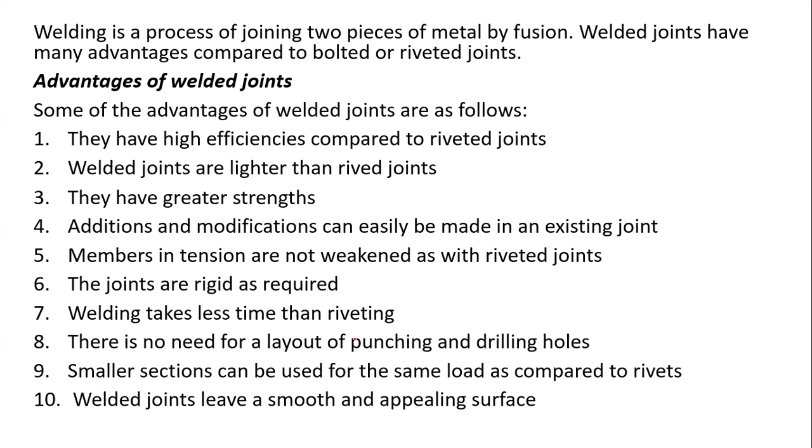And of course, smaller sections can be used as compared to the riveted ones. Then even the outlook, if you look at a welded joint, it looks smooth and appealing. The surface finish is quite proficient and more appealing compared to a riveted joint.

The bad side, welding is not a skill that you can just go to the road and pick anyone to do it. Riveting, as long as you've done a good job with drilling and punching in the right places, anyone can come and rivet your joints. It's not one that always requires skilled manpower. And when you look at welding itself, along the way, it distorts the members because you're talking about melting the materials that are involved, fusing them together.

Then also, inspecting those joints can be difficult as compared to riveted joints. Then also during welding, you have cracks that will be formed. Sometimes you also have stresses forming as a result of that. And remember also, the equipment you're going to use is expensive. And it's not one that you can just easily connect. It has parameters that you need to use as you do the connection. So equipment is more expensive as compared to riveting, which is relatively affordable and easier to organize.

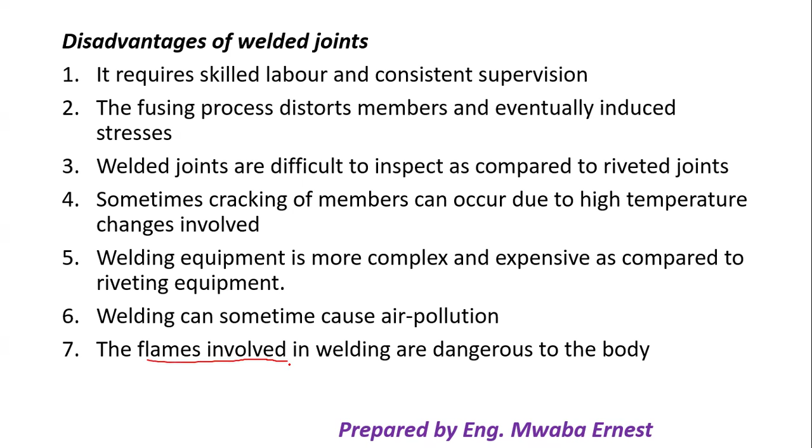When you are welding, you need good PPE that will protect your respiratory system, because the fumes that come from there pollute the environment. Even the light coming from the place where you're doing the welding can also be dangerous to your sight or to your eyes. Here we're talking about the same flames. So it is a health hazard. Welding can be so dangerous as compared to riveting in those areas.

Types of welds, we have butt welds. A butt weld, like we had mentioned, is where we bring the two ends of the materials together. Then perhaps we may do some mini grinding, and then we start welding the materials so that they can be properly fused together, making different shapes as you do that.

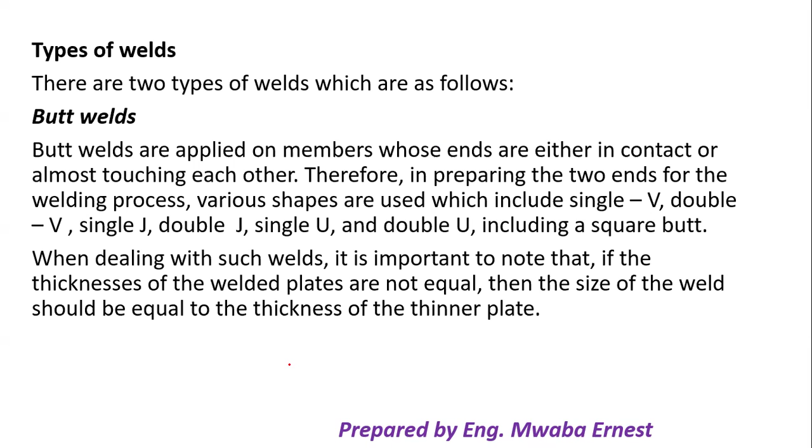In a lap joint, you have one material overlaying the other on top, then they overlap. Then you can weld at the end where they are meeting like this. So in this case, you may have this as your weld, and then your material there, that is where you have welded it. Everything has been welded.

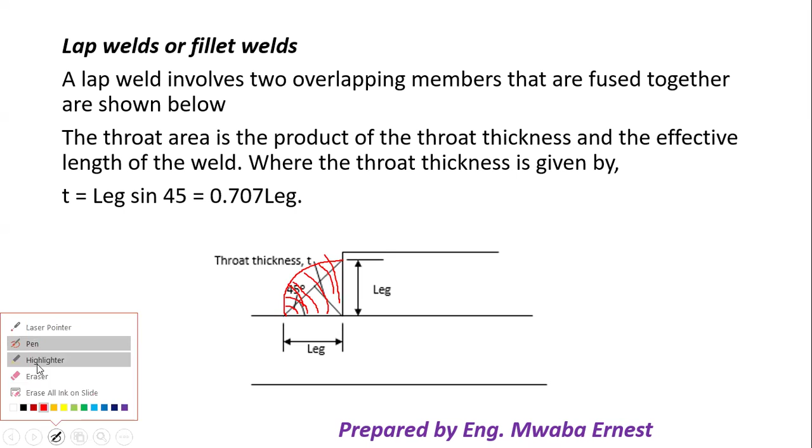But when we're doing the analysis, we're basically going to consider this like a triangle, because that makes our analysis more professional and gives us the results that we're looking for. So this is one member on top, and this is the other member, and we're joining them together. So what happens here is that you just draw a line. This is your weld. This is where you were doing the welding.

Then you have this line across. This line which is cutting across is the one we call the throat. The throat represents the strength of your weld. If this is distorted, or if your weld is going to fail, it means this has been weakened and it goes away.

And then the height of your weld represents what we're going to call the leg. So if we say, give us a 10 millimeter welding rod, we're basically asking that when you weld, because that's what is going to guide the height of your weld, it is going to be that height. So that's the one we'll be calling the leg.

From this, you can already see that the angle here is 45, just like there. So extracting this small triangle here, you will notice that T is opposite 45 degrees. So I can have T over leg, because this is the leg; T divided by leg already gives me sine 45. So I'm saying that sine 45 is equal to T over the height of your weld, or the size of your weld, as leg.

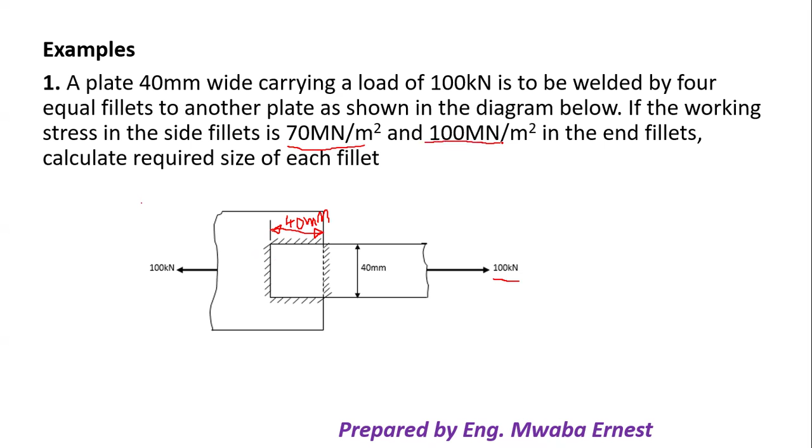So it can be easy to confuse. But what will help us is that we've said that the side fillets are carrying stresses of 70 meganewtons. Then the others, we're saying that the other one for the end fillets is 100. So we're going to start with the side fillets then.

So for the side fillets, this being the area, we're multiplying the throat by the length, which is 40 millimeters, ending up as 0.04. This gives us the area. To get a force, we multiply stress by area. Because if you look at the definition of a stress, stress is force over area. If stress is force over area, then you can make force the subject of the formula, meaning you just do the cross multiplication where you say stress times area, stress A.

And so this is now the effective area, which will now give me effective area 0.04T. This is for the side fillets. The question is, how many side fillets do we have? There are just 2. So 2, what is the stress acting in the side fillets? 70 meganewtons. So 70 times 10 power 6. Then you can now multiply it by the area, which is 0.04. What do I have? 5.6 million T. We still have the T hanging there.

Can I do the same also for the end fillets? Correct. So 2 times the stress in the end fillets times the effective area. The dimensions were basically the same. So the area is also 0.04T for the end fillets. So here I have it, 0.04T times the stress in the end fillets, which is 100 by 10 power 6. Everything multiplied by 2. What is my result? 8 million T.

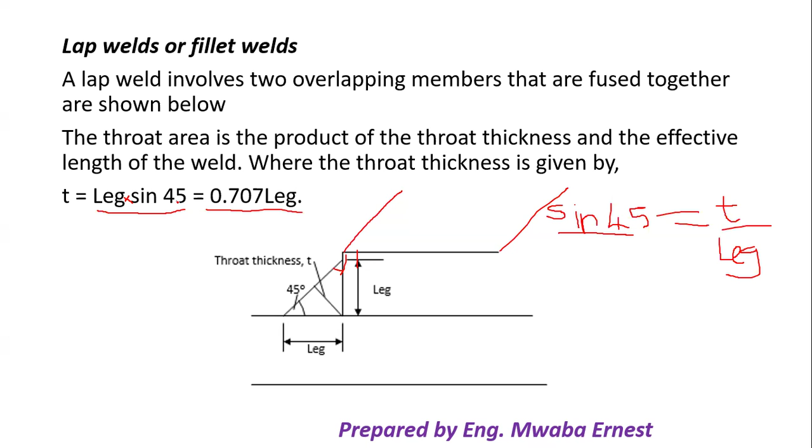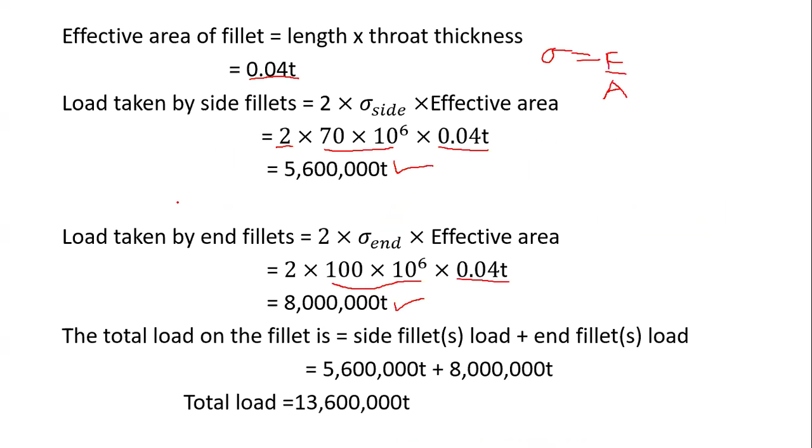Let's go back where we're coming from. What did we say about this? We said T equals leg sine 45 by standard, by the nature of this fillet we're welding, unless special conditions have been provided that perhaps someone was doing a special weld which comes with a very funny shape as it is filling into the metal there, trying to make a joint. But in this case, things are straight to the point. So here I recall the formula, which was T is leg sine 45. And I'm looking for the leg, which is the size of the weld. Make it the subject of the formula. I'll have leg is equal to T divided by sine 45.

So then my T is this number I have here, 0.007353 divided by sine 45. When I do that, my answer is 0.0104. This is in meters. Suppose the question is asking you to convert this to millimeters. You get that answer multiplied by 1,000 and you get it as 10.4 millimeters.

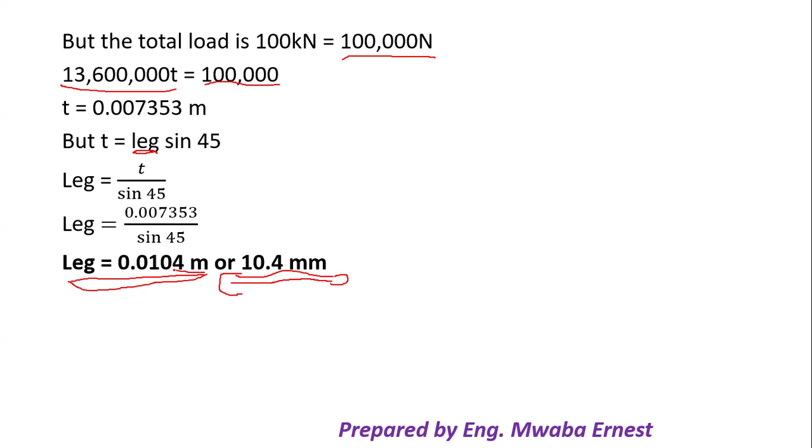Again, my emphasis is you can be intelligent, wonderful, good enough. You are a mathematician, congratulations. But when you get your final answer like that, and there are no special conditions attached, leave it like that. This is your final answer. If the question was pushing you to convert your answer, or we are saying that traditionally the weld size is supposed to be in millimeters, then you can do that. But for now, leave it in meters like that. You're okay. There's no stress about it.

Here's our second example, last example. So we have this special shape you are seeing here, which has 6 welds. 1, 2, 3, and 4. These are all diagonal welds. Then we have 1 and 2. These vertical welds are actually behaving like end fillets, so we are calling them end fillets.

By inspection, you can already see that the length of this end fillet is simply 50 millimeters. Do I know the length of this diagonal fillet? I don't know it. What am I supposed to do? I can use Pythagoras theorem because I know this length. I also know this length. With that in mind, let's fish out information provided in this question.

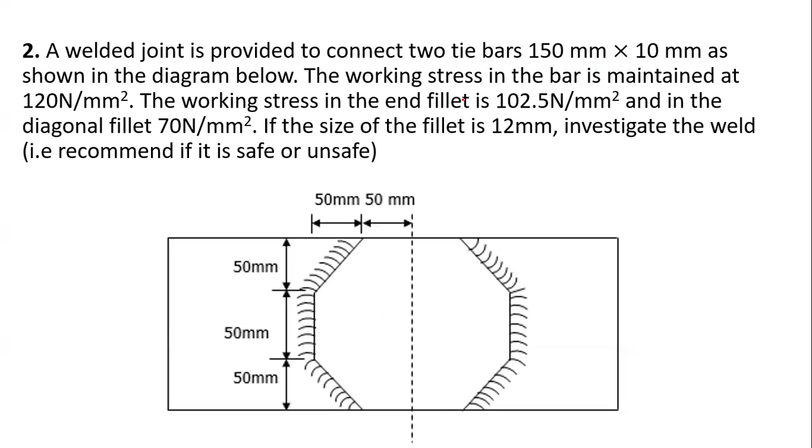Here we're told we have a weld provided to connect 2 tie bars 150 by 10. This is what we are connecting together. So the dimensions we have here have nothing to do with the weld that we are going to do. This is for the material, and we're going to use it to reveal the load we're dealing with. Then the stress in the bar is that. Then we also have the stresses that each of the welds are going to be subjected to.

So let's get to the data. Cross-section area of the bar, 0.15 by 0.01, because it's 150 by 10 millimeters. Then the product is 0.0015. What is the stress in the bar? It is 120 by 10 power 6 because it's 120 newtons per square millimeter. Leg size, we've already been told that the weld is 12 millimeters, so we convert to 0.012. When you divide 12 by 1000, that's what you get.

Throat, by tradition, it's leg sine 45. Since we already have the leg, we replace it, 0.012 sine 45. So I have 8.485 multiplied by 10 raised to the power negative 3 in meters. I talked about the diagonal fillets. There are 4 of them. The length of each diagonal fillet is not known, so we use Pythagoras theorem because they have vertical and horizontal sides meeting at 90 degrees. 0.05 and 0.05, multiply everything by 4. After getting what is under the root, we get 0.2828.

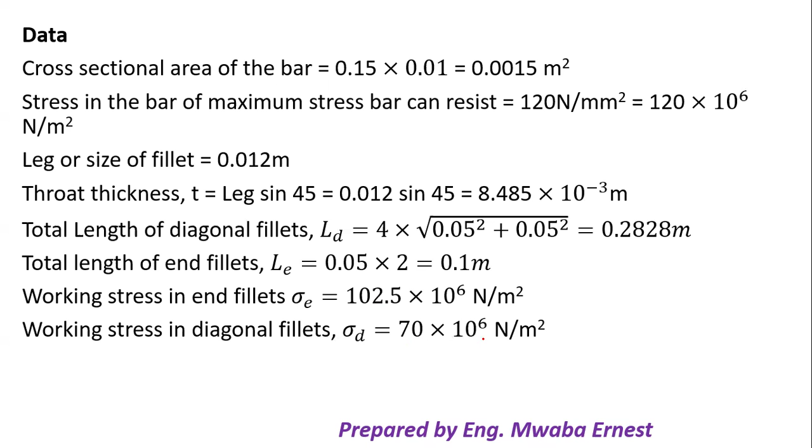The end fillets, we simply take their lengths as 50 millimeters, so 0.05 by 2, giving us 0.1. Then the working stress in the end fillets is 102.5, and for the diagonal fillets is 70 by 10 power 6. What is the maximum force in the tie bar? The load. We multiply the stress, which was 120 by 10 power 6, by the area of that bar, which is 0.0015. The answer you get is 180,000.

Then let's pick the 2 welds. The first one is the end fillets. The end fillets were under a stress of 102.5 by 10 power 6. Length of the end fillets is 0.1. The throat is 8.485 times 10 raised to the power negative 3. Then the load in the end fillets is 86,971.25.

From there, I go to the diagonal fillets. The stress was 70 by 10 power 6. The total length of the diagonal fillets was 0.2828. The throat is the same, 8.485 times 10 power negative 3. When you enter all this in your calculator, you end up with 167,974.63.

Now, here I'm going to get the total load. I'm going to add the one for the diagonal fillets to the one for the end fillets. So I add 86,971.25 to 167,974.63. I get 254,945.88. What is this number representing? This is the capacity of the welds. This is the strength of the welds.

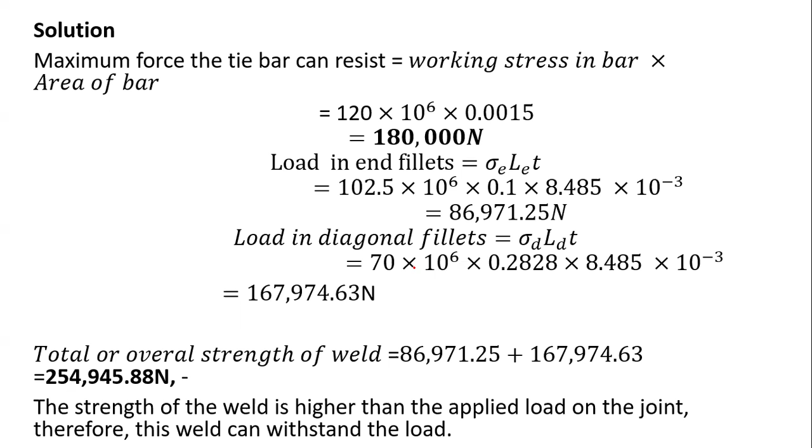So we end here, and next we'll look at failure analysis.